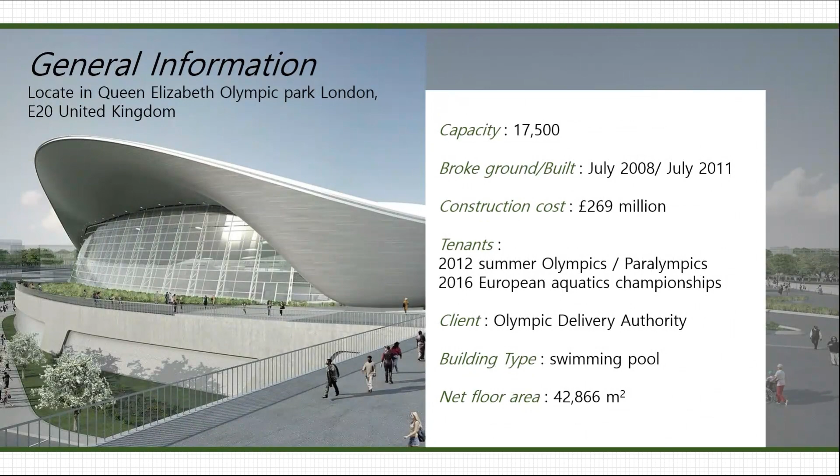Anyhow, let's focus on our building. Our building is built for the London Olympics. Its type is swimming pool, used by athletes at the Olympics. Client is the Olympic Delivery Authority. Its capacity is 17,500, built from 2008 to 2011, construction cost is £269 million, and net floor area is 42,866 square meters.

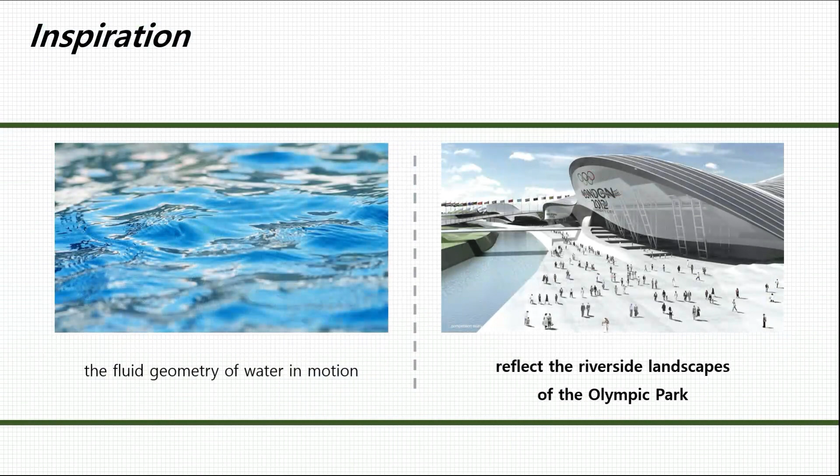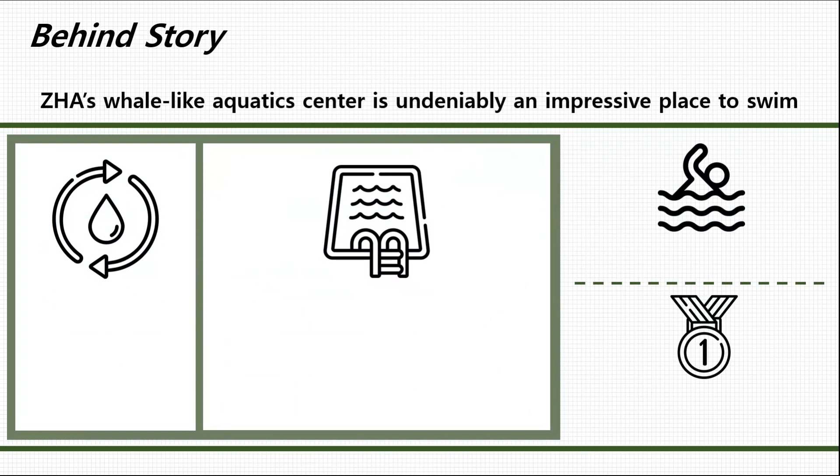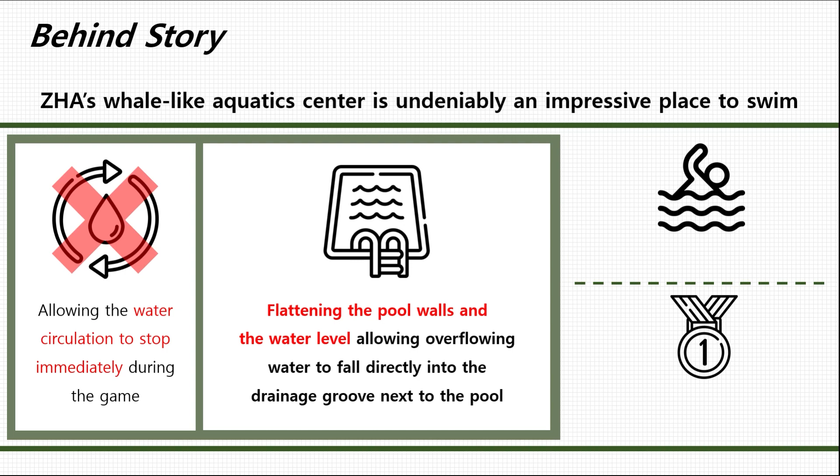Next, let's talk about inspiration. The architecture concept of this London Aquatic Center is inspired by the fluid geometries of water in motion, creating spaces and a surrounding environment that reflect the riverside landscape of the Olympic Park. This building is designed to reduce the record of athletes as much as possible by allowing the water circulation to stop immediately during the game and flattening the pool walls and water levels, allowing overflowing water to fall directly into the drainage groove next to the pool. This can effectively reduce water resistance and hence reduce the record.

These are the very first ideas produced by Zaha Hadid. Even in the very first drawings, the design style of the practice can be seen. A key principle followed throughout the design and development of the Aquatic Center was that the building should convey the idea of liquid and fluidity in its form, and the repeated similar designs showed this in the form of flowing roofs. Originally, the design for the Aquatic Center covered much larger areas, and the first few models made show an attempt to draw the desired fluid shape from the topography of the site. Although those first designs were not chosen, the Aquatic Center still retains its fluid shape, along with the surroundings.

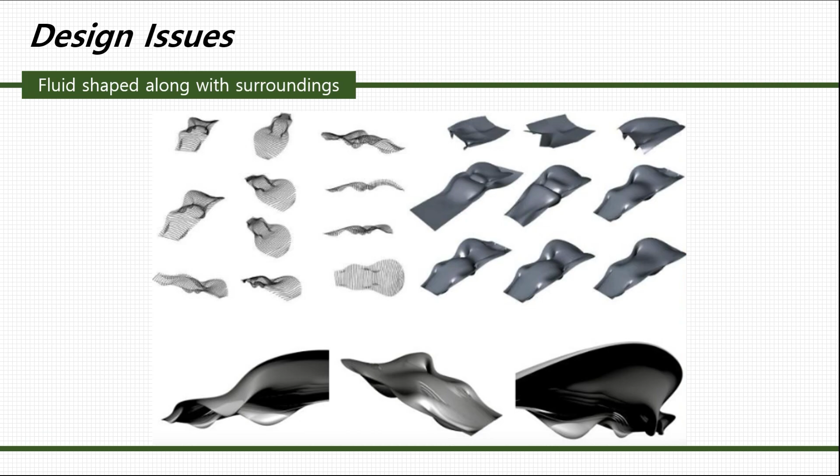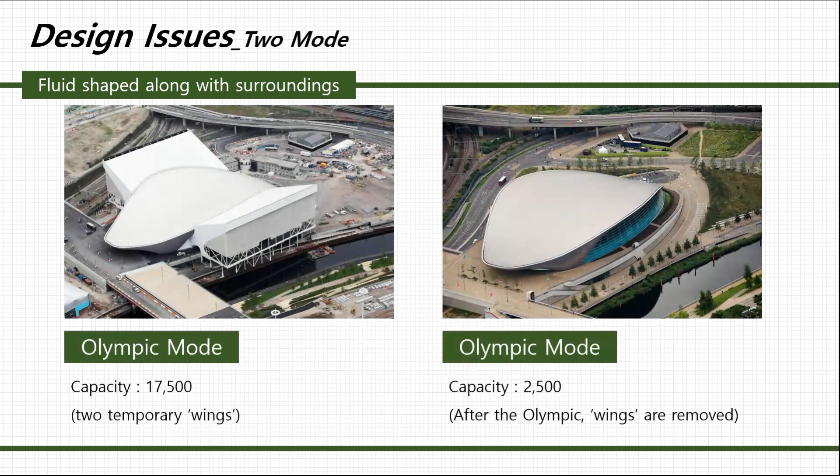One of the key reasons London won the bid for the Olympics was that there was a long-term plan after the Olympic Games were finished. Accordingly, there were also after-plans for the Aquatic Center. The notable element of the design is the temporary seating stand, the wing projecting from either side of the building. These wings allowed the building's capacity to reach 17,500. This wing design makes the building serve both long and short-term goals.

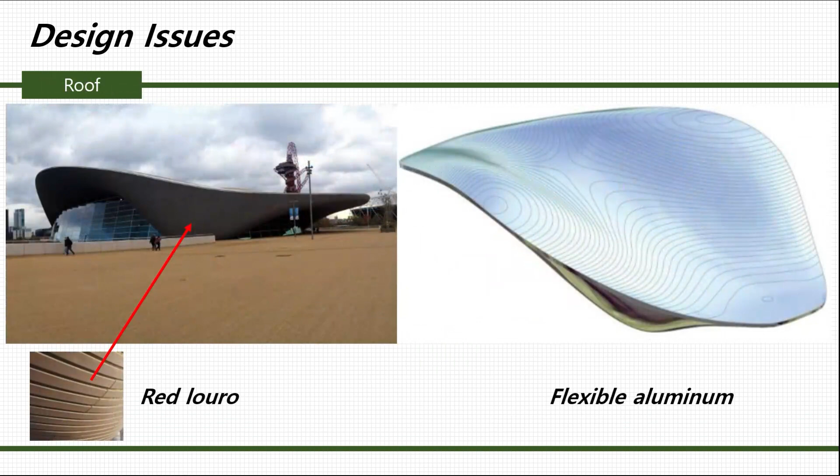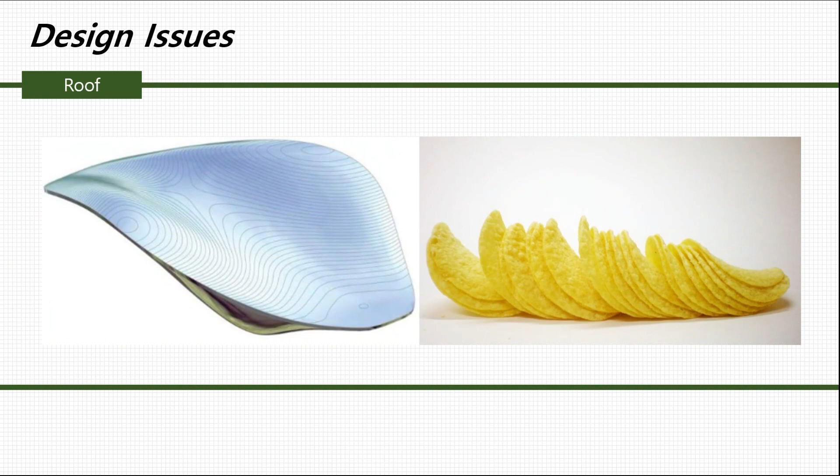Perhaps the most notable part of the Aquatic Center is its roof, designed in a wave-like shape to represent the fluidity of water. The roof is primarily made of two materials. The underbelly and facade are made of red louro. The roof, which cannot be seen from ground level, is made from highly flexible aluminum. The upper facing side of the roof is a complex 3D double curved shape. You can simply picture its design by thinking of a Pringles chip. The facade of the roof was carefully chosen to complement the curvature of its geometry.

The final choice of red louro was chosen for two key reasons. In terms of durability, the wood is highly moisture resistant and has naturally occurring oils that deter insects and fungi. The second reason is that when weathered, the wood takes on a silvery gray color that was desirable to give continuity from the metal gray sheets of aluminum on top of the roof. The roof is referred to as floating because of the way it meets the ground. The red louro becomes prone to rot if it remains in contact with the ground for a long time. To overcome this, a podium separates the roof from the ground. A timber cladding stops 200 mm above the ground, and under it there is a sloped drainage. Textured asphalt rises towards the roof and gives the impression that it floats.

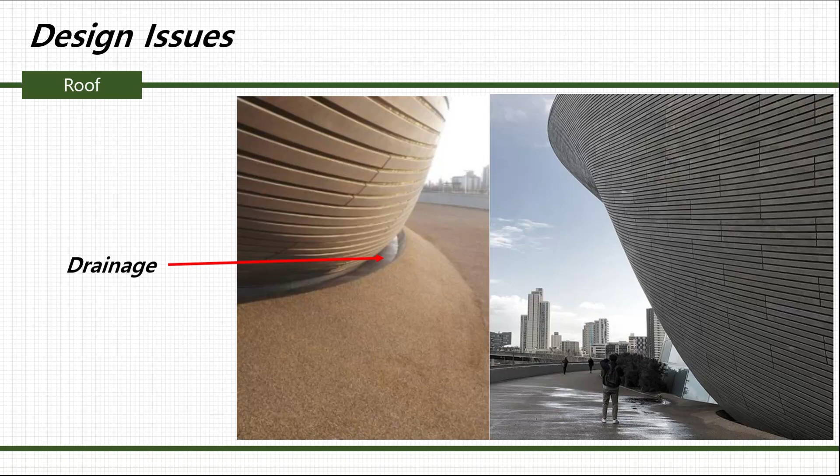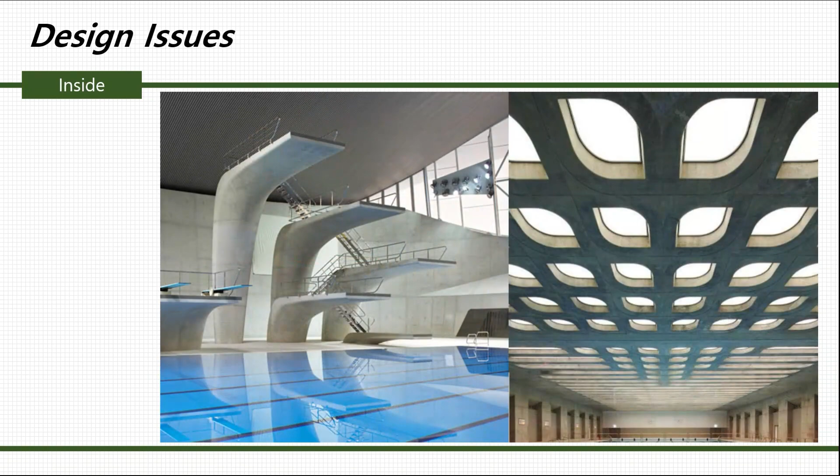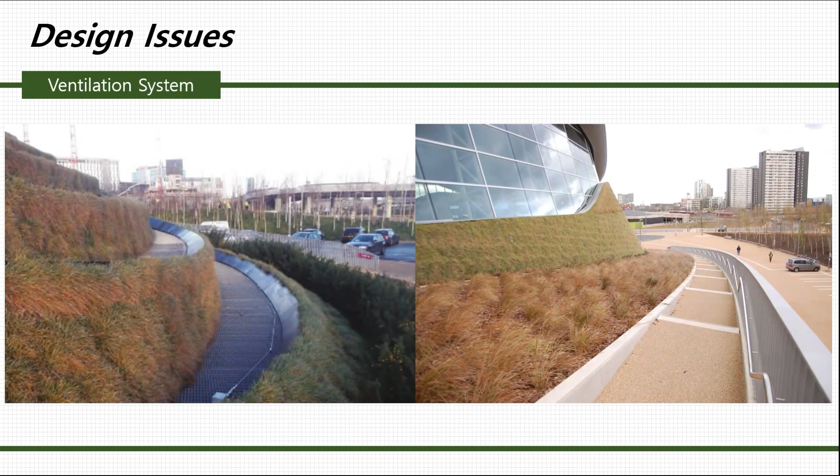The design of the ventilation system is also amazing. It has been cleverly integrated into the design of this building. The grass hill at the southern end of the building conceals vents that draw air into the building.

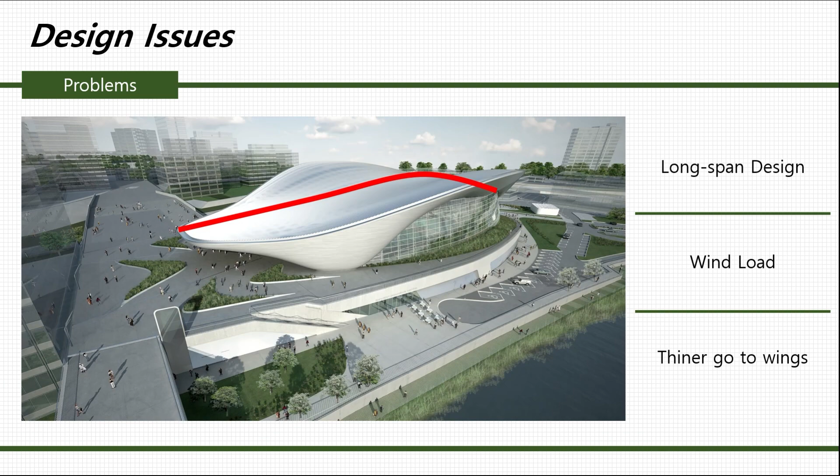The fluid-shaped design roof required detailed design plans for engineers for fabrication and erection. There were several problems for the fluid design. First is the long span design, and the second is the wind load over a broad area. Third is the shape becoming thinner toward the wings. These were the main challenges for engineers to realize the flowing geometry that Zaha Hadid defined.

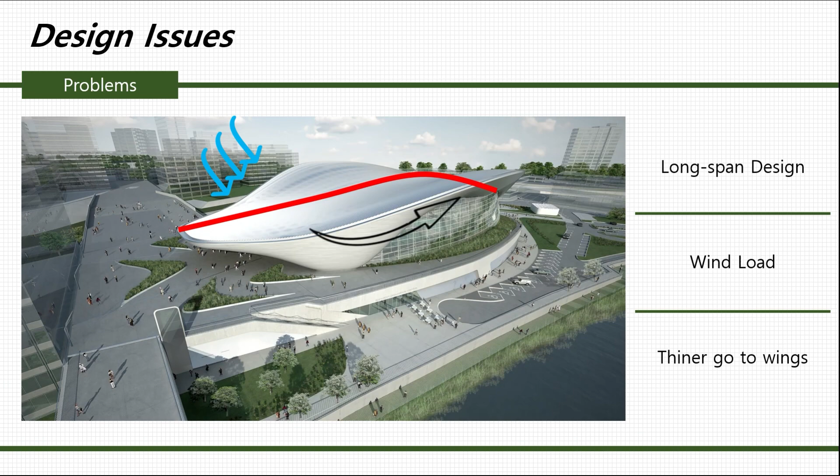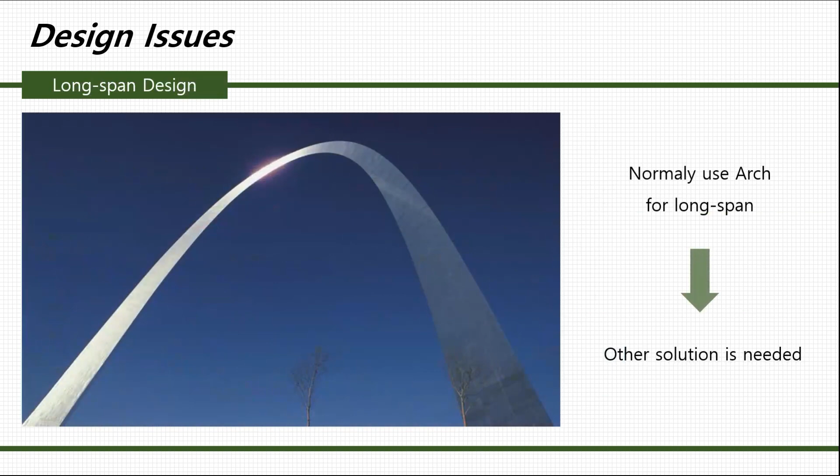Let's see how they resolved the problems. For the long span design, engineers normally use arches, but at the London Aquatic Centre, another solution was needed to minimize the interdependence of the roof and substructures and make it easier. So instead of arches, the engineers used a series of trusses spanning in the long direction. The trusses were supported at just 3 points. This makes an effective structure with limited supports.

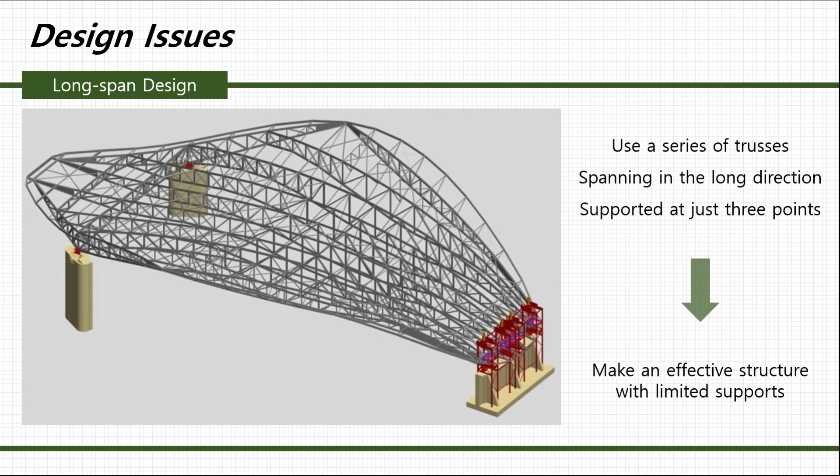Wind load was also a key design problem. The roof needed to resist wind loads over a broad side area. To analyze the wind loads, they used wind tunnel testing, commonly used for skyscrapers, automobiles, and aircraft design. Through extensive use of wind tunnel testing to gather simultaneous measurements, the refined wind loads were determined.